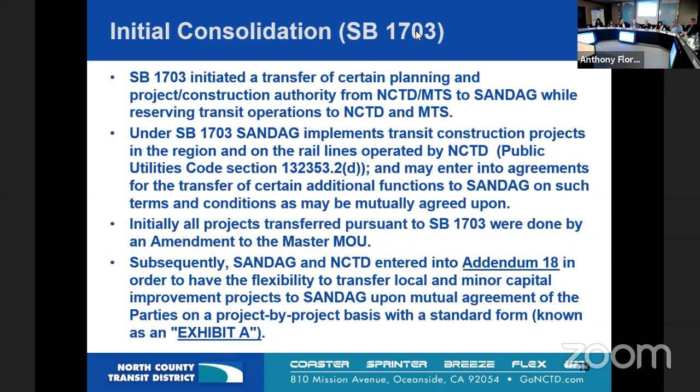Digging a little deeper into some of the key functions and policies of each agency type as designated by that master MOU, SANDAG, as the Metropolitan Planning Organization, develops the Regional Transportation Plan, which spans several decades, the Short Range Transit Plan, which spans 5 years, and manages policies such as the public input process and the regional fare policy. SANDAG also provides technical assistance to the operators, as well as defines regional and corridor transit services and parameters for local transit services.

Additionally, the operators MTS and NCTD must develop service implementation plans, which the SANDAG Board of Directors ultimately adopts. Within those service implementation plans, NCTD and MTS are responsible for planning and implementing regional and local transit services, including the development of schedules, operating, and capital budgets. The operators also provide input to SANDAG on their long and short range transit plans.

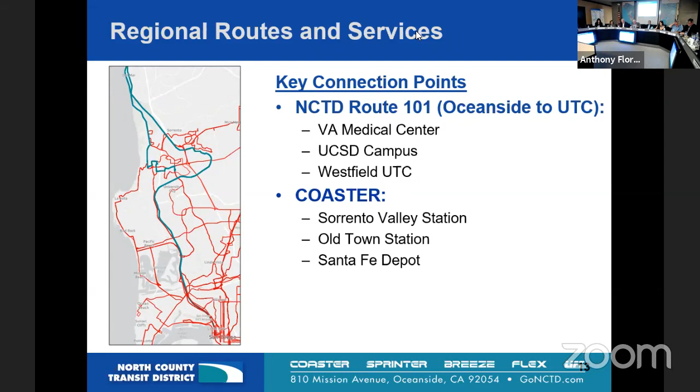When looking at the transit services as a whole in the region, there are a few key connection points between NCTD and MTS services. On the coast, we have NCTD Route 101 and the Coaster, which travels into MTS's service territory. You can see Route 101 and Coaster in teal and MTS's bus routes in red.

Further inland, we have MTS's routes 235 and 280, which travel between Escondido and downtown San Diego. Additionally, NCTD's Flex services connects with MTS's rural services in Ramona.

NCTD is currently in the process of developing its 10-year strategic plan. In the fall of 2019, the consultant team conducted an intercept survey throughout NCTD's service area to better understand the travel and transfer patterns of its existing customers. The top 3 locations where surveyed NCTD customers transferred were Vista, Escondido, and Oceanside Transit Centers.

Additionally, nearly 80% of all surveyed transfers occurred between NCTD services. That would be Breeze to Breeze or Breeze to Sprinter, for example, while 18% occurred between NCTD and other agencies, which includes MTS as well as RTA, Metrolink, and Amtrak. Of that total, 11.4% were coaster interagency transfers.

Now we'll take a look at the shared technologies between MTS and NCTD. We have our regional fare collection system. You might recall at the January board meeting, MTS staff provided an update on the regional fare collection system branding. The next generation fare collection system will replace the existing system with new hardware and software by the end of this calendar year. The existing system has servers located at MTS facilities with smart card systems installed on all regional buses and TVMs at all rail stations.

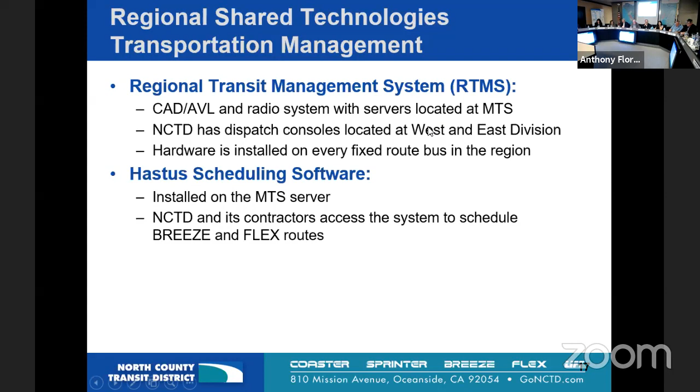A few other shared regional services: we have the Sorrento Valley Coaster Connection, which is a service operated within MTS's service area that also benefits coaster customers. We also have a unified fare structure that was simplified this past year and enables customers to purchase a pass from either operator, and it works across multiple modes. And we also have bus bridge services. Under the existing MOU between MTS and NCTD, MTS provides bus bridge services for coaster service disruptions south of Solana Beach to ensure a timely response to service disruptions on the corridor.

And with that, any future decision to consolidate the transit agencies in the region should be predicated on the NCTD board's determination that such consolidation provides benefits to the region, creates efficiencies, protects the service needs of North County residents, and other public policy considerations of importance to the board.

At this time, none of the board of directors of SANDAG, MTS, or NCTD have publicly discussed or proposed consolidation of the transit agencies. Accordingly, NCTD staff proposes that the board express its support for maintenance of language provided in NCTD's current enabling legislation.

So for now, I will pause for questions on the legislative agenda before we get into the discretionary grant strategy.

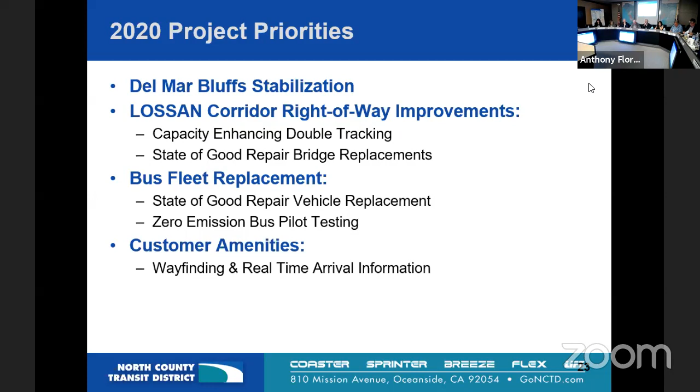So our project priorities for 2020 include the Del Mar Bluff stabilization, as well as LOSSAN corridor right-of-way improvements such as double tracking and bridge replacements, bus fleet replacement including both state of good repair and procurement of zero emission buses for pilot testing, and customer amenities such as static and digital wayfinding and real-time arrival information.

NCTD is continuing to work with Sandag, Caltrans, and other state partners to identify state programs in which the Del Mar Bluff stabilization is a competitive project. There are also several shovel-ready double tracking projects along the LOSSAN corridor, which would compete well within many of the programs that emphasize transformative capital projects.

So a few key upcoming submittals include the Del Mar Bluff stabilization, which we're submitting with Caltrans and Sandag to the USDOT's INFRA program, and then two hydrogen bus procurement projects, which include the procurement of 8 hydrogen 45-foot buses to the FTA's low or no emission bus program and bus facilities program.

And with that, we have the staff recommendation that the Board of Directors adopt and authorize staff to implement the calendar year 2020 legislative agenda and receive the calendar year 2020 discretionary grant strategy.

So I'd like to just restate the substitute motion for the board's clarity. The staff recommendation is to approve the legislative agenda, which includes approval of support for the maintenance of the existing enabling legislation, and the added piece the board has placed as a substitute motion is to direct staff to prepare a written letter for the board's collective signatures, to be sent to Sandag in support of the maintenance of the existing legislation.

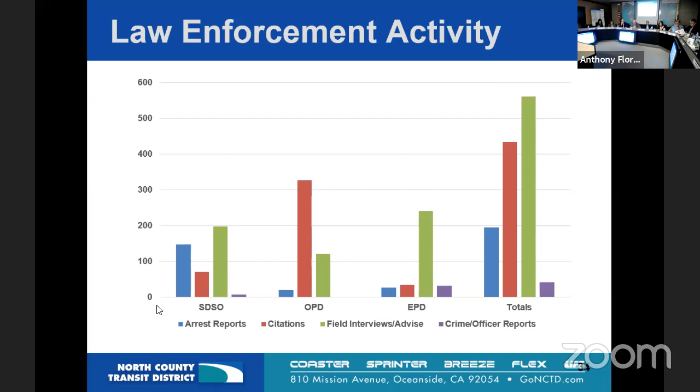I have a little expansion on what we're doing to address some of these fare evasion challenges on a couple slides coming up.

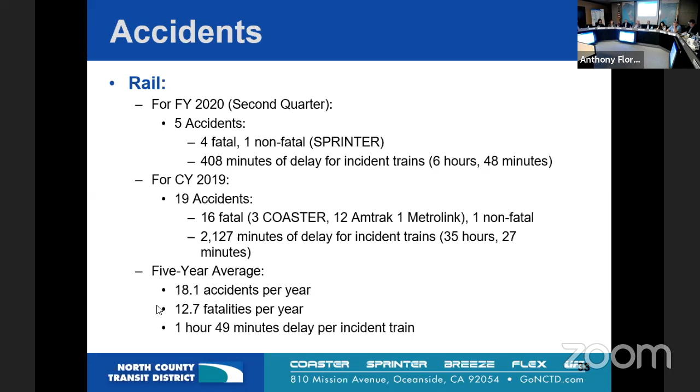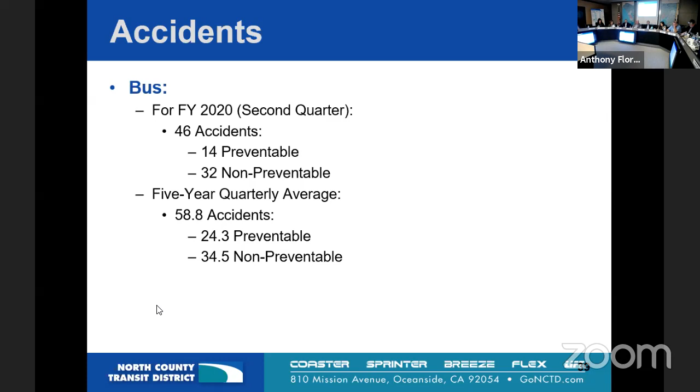Trespasser mitigation study is ongoing. As a reminder, we started back in October with 3 specific locations we were looking at in Oceanside, Encinitas, and Del Mar. We received a draft site conditions report and did a workshop a couple weeks ago to review potential risk reduction alternatives. It was a productive meeting. We have a final report due to us on the 1st. I know I've worked with some of your city managers that want to review the report, so that'll be available for comment. It's scheduled to come to the board in April, combined with another item involving key fencing at some of these locations, along with the trespasser mitigation study results.

Towing and signage: we've executed 4 towing contracts with 4 different companies, covering all of our parking lots, platforms, and stations throughout the service area. There are sample signs in production right now. Once they're produced, we'll install them and then coordinate with the appropriate tow truck companies for those not following the rules. In addition, we had additional suicide prevention signs created, and those are being installed as we speak on the Escondido subdivision. All of our stations will have signage with that crisis hotline number for folks to call should they desire.

How long can somebody, if they get on at Oceanside Transit Center and go down to, say, the airport and fly away for a week, leaving their car at the transit center, what's our time limit on parking at the different stations?

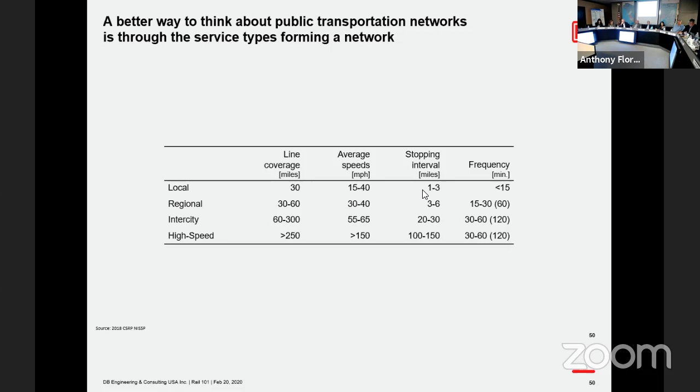Systems, again, going back to competitive journey times, convenience, and consistent quality. I want to give you a quick example of the region of Zurich again. I have a few Swiss examples built in here, European examples, where in their strategic plan they detail further out what elements or components are the basis of those 3 main success factors.

On competitive trip times, of course, providing direct connections where you can—and that's the big caveat here—where you cannot always and everywhere provide frequent direct connections, and therefore it's equally important to optimize transfers between services.

In terms of easy and convenient use, one important factor is providing repetitive so-called pulse schedules. I'll get into this in more detail because this is a key element that connects a lot of those things, and it's a key element behind the LOSSAN optimization study as well. Pulse schedules mean services operate repetitively every 30 minutes or every hour, with a consistent pattern throughout the day. I'll get into more detail on that.

And then consistent high quality, which is defined as providing long hours of service, dense or frequent services, and guaranteeing connections and providing reliable service. So there are a few components here that are equally important. They are influenced by how we plan the service, but then also how it's being delivered.

Going into the pulse scheduling and the details there, it is an important approach that brings together a number of those success factors. We talked about some of the benefits on the passenger side, that it's simpler to use, more intuitive, but equally important, there are real benefits to providing repetitive, more simplified and standardized service on an operation side as well.

First of all, by providing connections more consistently, services are able to create a more extensive market reach. Vehicle utilizations are almost always better because the rotations of the vehicle are better, and there are also benefits to punctuality. And lastly, and often from my perspective most importantly, a pulse type schedule with repetitive services is also the best way to use capacity and use the infrastructure in the optimal fashion, and have a tool to do good planning.

This next section is about being able to identify what investments truly make sense. Because investing in rail infrastructure, and specifically when it's about rail, always takes a long time and costs a lot of money, and those projects had better be exactly what you need to unlock better service.

To briefly explain this connections and connectivity by design versus connectivity by coincidence concept, I want to explain this repetitive character. A pulse schedule has different key locations in the network where all the services come together and provide an ability for passengers to transfer.

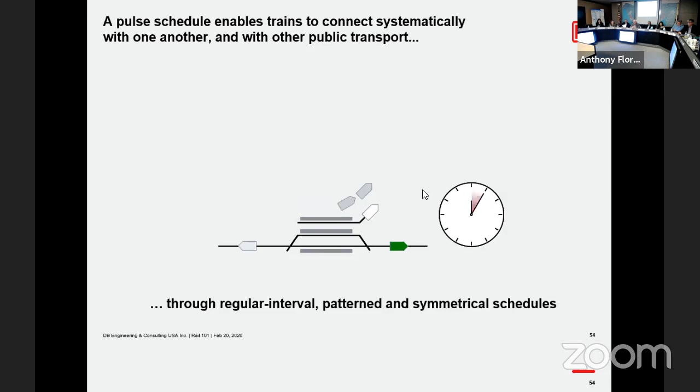And that happens not only once, but repetitively throughout the day, so that even people who want to make a trip that involves a transfer know what to do every time, every hour or every half hour when these services operate. To put this into context, this is also the now-adopted vision of the state with the most recent state rail plan, where a network of repetitive pulsed services throughout California, making key connections at key locations, is the vision for 2040, and subsets of that for the implementation years.

International benchmark examples, like Switzerland, give us a lot of understanding of what the effects are of those sort of systems.

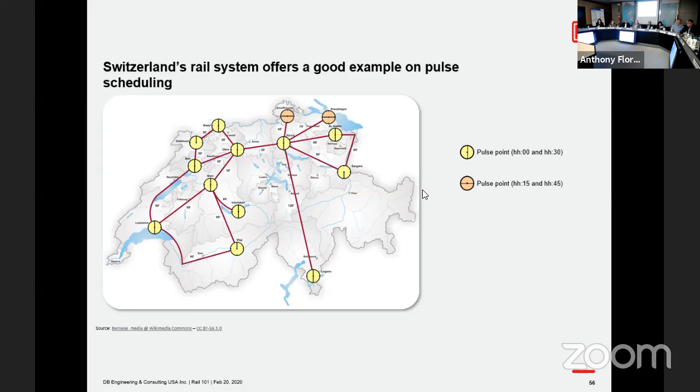To make that a little more tangible, I brought a quick video of these transfers as well. You have to excuse it, it's shot by myself a few years ago with an iPhone a few generations back, so it still shakes a little. And you know, they now have really good algorithms and software to prevent this.

Buses arrive, in this case around minute 45 and minute 15. Buses come in, and then train services come into the station. This is actually a station that has roughly a similar layout to Oceanside, with a corridor that goes north-south, 2 different lines on that corridor that go into different directions, and then a third line that comes in and terminates at that station. So within a few minutes, all the services come in.

The station is occupied by 5 trains in total. Everybody, or a lot of people, get off and transfer to either the other trains that go into other directions or onto buses.

And then within a few minutes, everything departs again and the station empties out, where first all of the different train services, one more express, one more local going into the direction of Zurich, leave. And then lastly, a few minutes later, the buses leave the station.

The buses here, maybe take a look on the inside. They're not completely packed because this is 10:30 or 10:45 in the morning, but they still have quite a few passengers riding because it caters to a whole sort of different needs, not just commuting to work, but also leisure trips, business trips, shopping, visiting a doctor, and so forth.

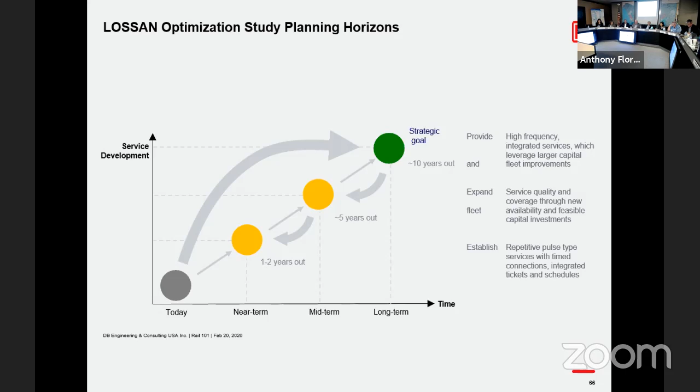Right now we're working on this service design. We're developing different network maps with the connectivity options. There are always trade-offs; often you cannot get everything because things are interdependent. So we're working through a whole number of scenarios, looking at the operational impacts and the associated infrastructure projects. There are frequent meetings that include NCTD as a stakeholder as well.

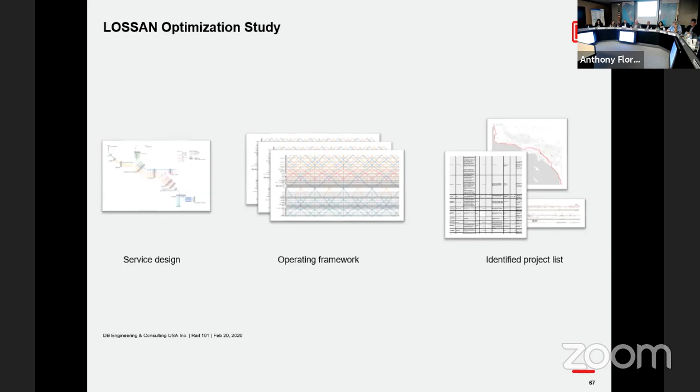On the coaster side, I'd like to zoom in to that part of the corridor and give you an update. One of the candidate concepts right now for the near term, still working drafts but supported by more and more arguments, is a 20-minute service, or the ability to run 20-minute service. You have to distinguish between what the infrastructure is able to carry and the later decision of what exactly you carry all day long. So about every 20 minutes, service made up of Surfliner trains and Coaster trains.

Then I'll skip ahead to the long-term concept. In the long term, again about 10 years out, assuming that a lot of the double tracking work in the San Diego area—projects that have already been started or are constantly being pursued—are in place, we developed a concept that in this area of the corridor would provide the ability to run up to every 15-minute service, where one of those trains is a Surfliner and 3 trains would be Coaster trains in each direction. Those concepts are still constrained by some of the single tracking that remains, and that constrains the corridor not only in this place, but also exports some of those constraints further north through the Surfliner trains.

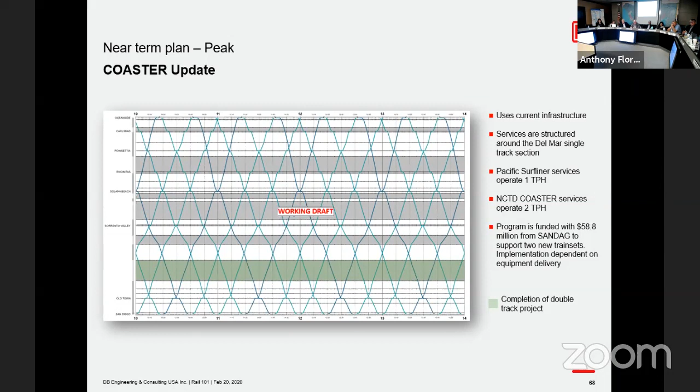Thank you very much. Yes, and indeed the surfliners here in this part of the corridor are an express service. They are a few minutes faster. It's not a huge difference because there are still constraints of the infrastructure, and one of the big constraints is single tracking around Del Mar that also imposes this 20 minute kind of distribution in both directions around this area.

But then towards Oceanside, the surfliners make up a bit of time, and towards San Diego as well. The long term goal, through diminishing or eliminating some of those constraints, provides the ability to run 4 trains an hour that are running roughly every 15 minutes, still one of those trains being a surfliner and 3 being coaster services.

So the coasters here would run 15, 15, 30, 15, 15, 30, and in off-peak times, you could easily downsize this to coasters running every 30 minutes or just once an hour, and then together with the surfliner, still providing between San Diego and Solana Beach trains that operate evenly distributed every half an hour, where every half an hour you have an option to take a train.

With that, I would like to give you a brief update on the Sprinter work as well. As I said, by amendment, the Sprinter corridor was added to this work too. And the goal here was to look at

mainly 3 different concepts for improved service: to look at potential benefits of express service that operates using the freight bypass, looking at increasing frequencies to either 20 or 15 minutes, and to look for opportunities to better connect Sprinter services in Oceanside to services on the LOSSAN corridor.

We looked at 3 different concepts: one with this express service using the freight bypass, then a concept where we looked at what the Sprinter corridor would look like if trains operated every 20 minutes, and what it would look like if we operated every 15 minutes. The conclusion is that the 15-minute service provides the best connectivity in Oceanside and also works well with existing double track segments on the corridor already that are necessary now to operate the every 30-minute service.

With that, I'll confront you with another one of those colorful slides here. So this is the every 15-minute service. 2 different colors here, green and brown, that indicate new double track that would be required to make this service frequency possible from the infrastructure side.

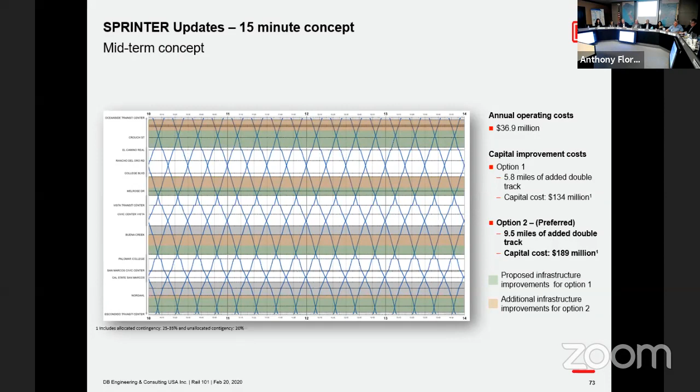In addition to that, we were asked to put together a couple hypothetical scenarios to test the effect that higher speeds on the corridor or different rolling stock would have. For that, we looked at a hypothetical 22-mile long corridor with either 15 stations, 10 stations, or 5 stations, and looked at two different speeds: operating like it does today, up to a maximum of 55 miles per hour, or up to 90 miles per hour.

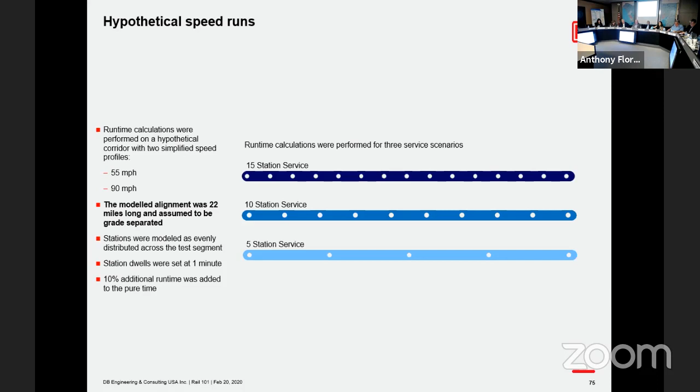Here we were looking at the current rolling stock, which are Siemens DESIRO. We also looked at state-of-the-art DMUs like the Stadler Flirt, and at potentially electrified multiple units.

The main difference between those rolling stock types are two things. One is their maximum speed, what they're allowed to go up to, and equally as important, the mean acceleration that really drives the difference between run times, if those vehicles are able to accelerate faster and get to those maximum speeds faster. Generally, diesel trains are slower at accelerating and electric trains are faster, and more modern trains typically are better because there's a continuous push to improve acceleration.

The overview of those different scenarios is this table. On the left-hand side, the scenarios that used a 55 miles per hour maximum speed, whether you have 15, 10, or 5 stations, and what sort of rolling stock is used, whether it's the current train sets, a modern diesel train set, or a modern electric train set. On the right-hand side, you see the same information for 90 miles per hour. The main insight is that changing speeds on their own has little impact.

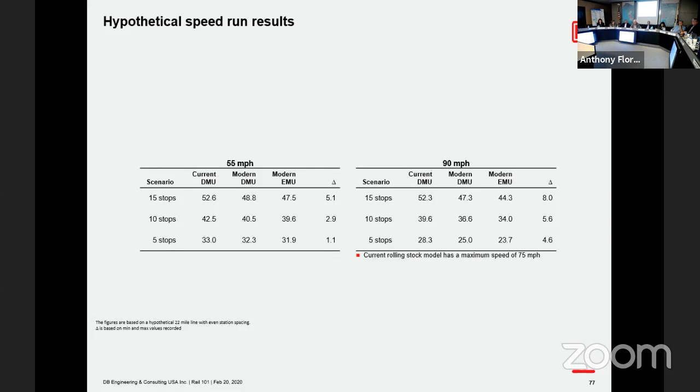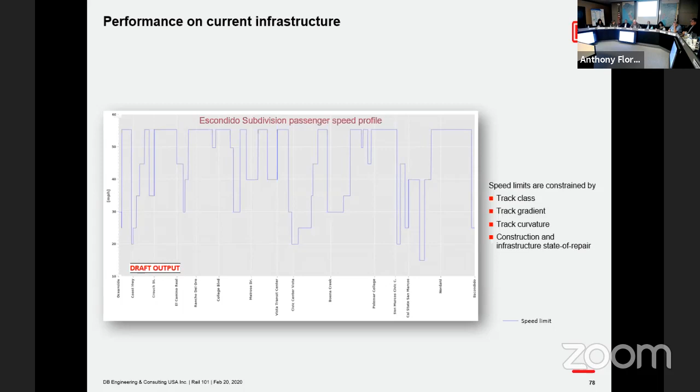One last diagram, just a different type to make this more tangible. Again, this is speed over distance. On the horizontal axis is the Sprinter corridor, Oceanside on the left, Escondido on the right, and speed on the vertical axis. The blue line is the maximum speed allowed in different segments of the corridor today. The absolute maximum is 55 miles per hour in some places, but there are various places where the speed limits are considerably lower, sometimes just 20 miles per hour, and sometimes even less, just 15 miles per hour.

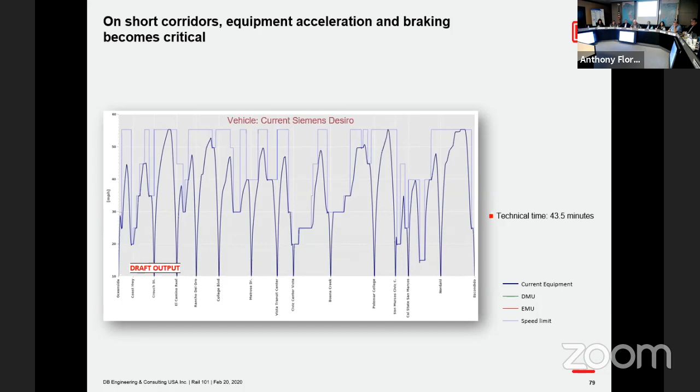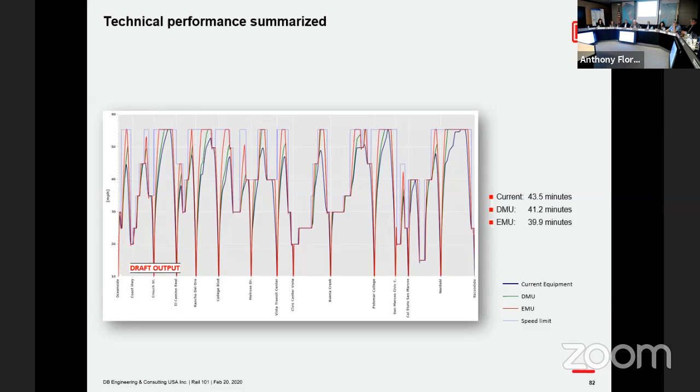A modern diesel multiple unit would accelerate a little faster and save a bit of time. An electric would be even faster, but again, it comes down to how much time you can really save. I'm not advocating for any new solutions here, we just did the analysis and compared the effects. With different vehicle technology, for example on the Sprinter corridor, savings would be somewhere around 3 minutes, and whether or not that's worth it is either part of a separate analysis or just a political judgment.

Final conclusions: there are significant costs in changing technologies from diesel to electric that must be kept in mind. NCTD is evaluating a future implementation of zero emission train technology with a replacement of the Sprinter fleet, which will need to occur by 2033 just due to train sets reaching the end of their life cycle.

Given the lengths of the existing corridors, there is currently no significant project activity that could yield substantial travel time savings, like increasing speeds and so forth that we just looked at. Thus, the recommendation is to keep the focus on increasing frequency, increasing reliability, and overall customer riding experience, including making connections to other services better, and supporting an increase in frequency of Sprinter and Coaster.

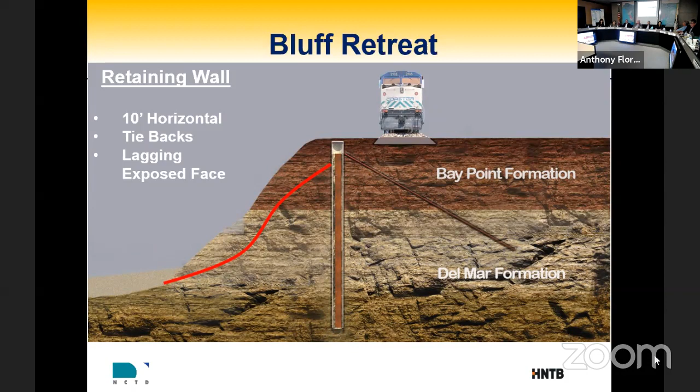Over time, we add in a lagging wall between them so it supports the material behind. It actually acts as a wall that we want to explain a little bit more about. We're going to get some help here from Imelda.

When we look down right now, we don't see anything. But in just a minute... okay, can you pause that for a second? We see... one more. So we see those soldier piles. Those soldier piles — we don't see them when we're walking out there, but they are under the ground, 10 feet apart.

Imelda, let's go on with the rest of the visualization — we'll show you exactly what happens here. First, we start with our soldier pile. It's a concrete pile that goes into the ground. You see the tieback that's in there, and there's a steel H pile in the middle of that concrete. The area in the front can fall away, and we expect that it will fall away.

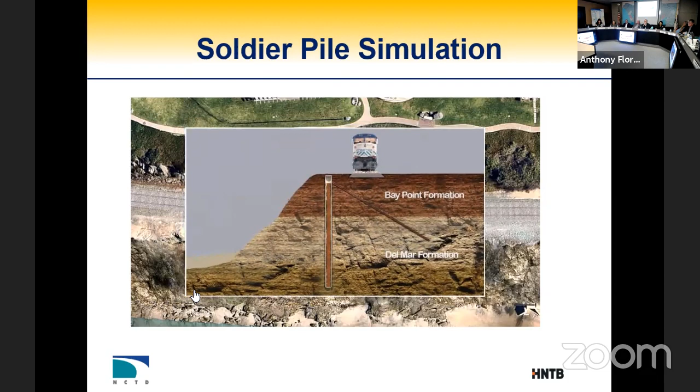Let's go back and take a look. There are soldier piles — we really don't see those soldier piles. They're going to go away in a minute here. What you see over time is that material starting to move away from the soldier piles, just from the natural forces of wind, rain, etc.

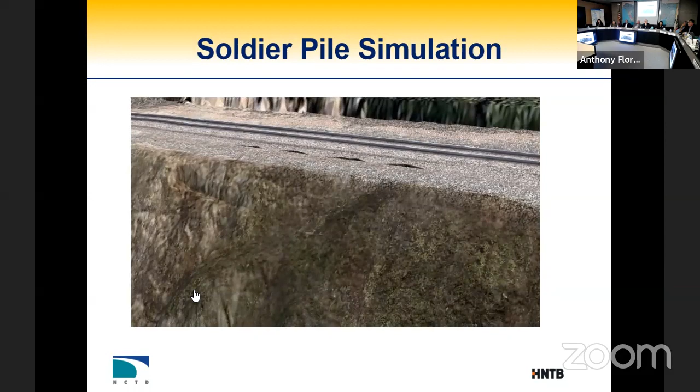Stop that now for a second. So what you see behind there — see how the arching occurs behind? That is actually strong enough to support that train load. That's exactly what we saw happen just after Thanksgiving, with the material actually standing and supporting the train.

Now, we can't leave it that way because it's going to be exposed to rain, wind, etc. So go ahead and start again — we're going to remove all of that material and clean it up.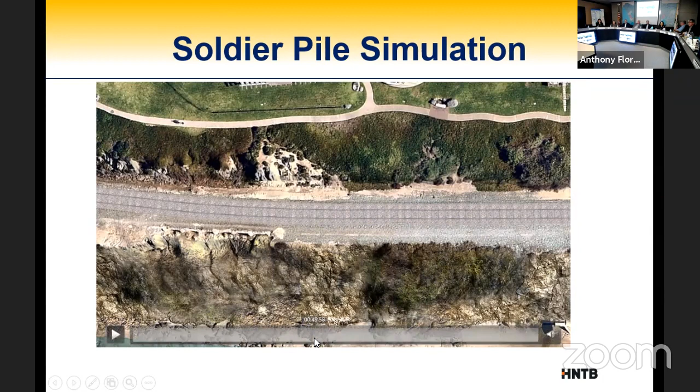Once we have everything cleaned up, we're going to add in dowels and a steel cage behind. We're going to put dowels into the existing piles, build a regular concrete wall like you would expect, then stand back and add some rock sculpting to it. We're going to put the ballast back in on top, fill back in as much as we can, and make it look like the bluff.

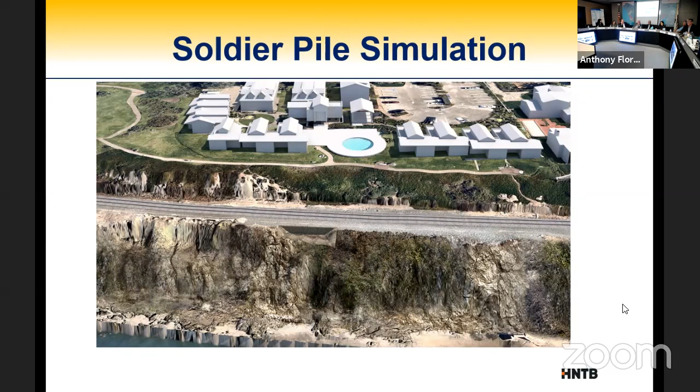That brings me to our next topic for this project. The train was moved to the bluffs in 1912, and we still have some 1912 infrastructure out there controlling our runoff. We've had a lot of development since then, so increases in runoff, concentration of runoff, and subdrainage are all issues for protecting the bluff. Controlling that water and not allowing concentrated water onto the bluffs to cause localized erosion is critical to avoiding significant failures.

This project includes a new complete analysis of drainage improvements. Some improvements were made back in 2000, but we haven't done anything since to repair drainage systems and control the concentrated runoff coming onto the bluffs. That will be part of what we do. We'll build the most significant improvements in Del Mar Bluffs 5, and plan for the future.

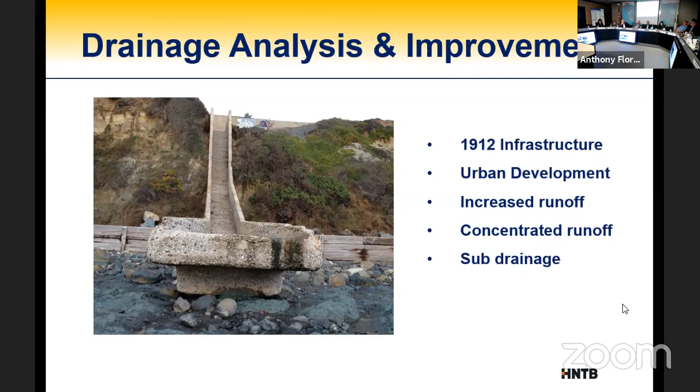Service life - the service life of Del Mar Bluffs 2 and 3. When we talk about service life, we talk about 20 years of bluff retreat. That was the time frame we used to estimate how much retreat we'd have when designing that soldier pile retaining wall. That really came from an estimate of needing 20 years before we had a tunnel. Well, we're in 2020. In 2000, we thought we'd have a tunnel by now, and we don't.

So times have changed. Those soldier piles, though, aren't gone - they've been there for nearly 20 years. They're still going to act as a shear pin the way they were always designed. It's the retaining wall function of them that was designed for 20 years of bluff retreat.

Now we're going to go in and do a reevaluation of all the priority areas, because obviously over the last 10 and 20 years, things have changed. We know we're going to complete the areas that were previously low priority, but there will be new areas too. In areas like you see here where material has sloughed away and it's close to the design height, in the coming years those piles will need additional reinforcement once they exceed that acceptable design height.

The bluff retreat trends - that's one thing we do have going for us now. From 2000, 2008, 2018 to 2020, together with work from Scripps, we have a better history of what's happened on the bluffs. We estimate 6 inches per year, but it's actually a very episodic thing - you see blocks fall, you don't see 6 inches at a time in general. So we'll be able to look back and see if there are any more trends in certain areas that would supplement that 6 inches per year estimate.

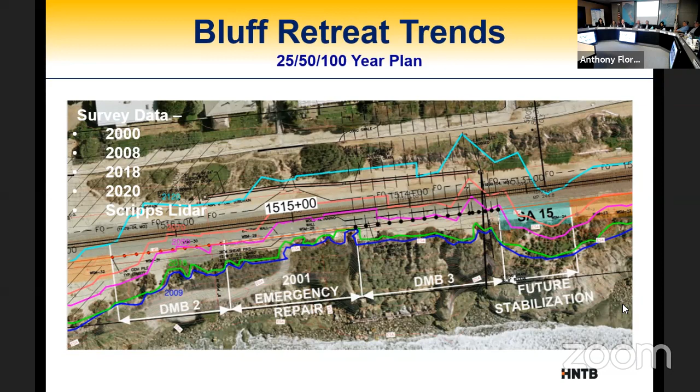That was 20 — the blue is 18. Excuse me, the blue is 2010, then we're at 2018. I don't have 2020 on there yet, and I don't have 2000 on there yet. Very simplistically, right now we offset 20 years into the future, 50 years into the future. Where would you be in 100 years? We're not going to design for 100 years, but we don't want to just be in a vacuum — we want to understand how these soldier piles might fit into the future.

Which brings me to how we can extend the service life of the systems we've already built. Looking at the soldier piles we built in Del Mar Bluffs 2, they're shorter, not designed for more than 20 years, and they're getting close to some of those areas. You'll see the red line — in the future we're going to see more bluff retreat. So the solution to extending the service life of those piles is to add more lagging and another tieback. It won't last forever, but it will increase the life of that facility in place.

When we look at other solutions like what we're doing now, we're looking at simpler things — can we make some of our piles longer rather than putting a tieback everywhere? Longer piles now are about the same price as a pile and a tieback, but it gives us more flexibility for the future. We also want to apply lessons learned from previous projects where we added lagging, because lagging looks bad to the news media. We really intend for it to be there, but we're looking for simpler, more expeditious solutions for adding that lagging instead of designing case-by-case — just lessons learned on how to make a more efficient system out of soldier piles to support our bluffs.

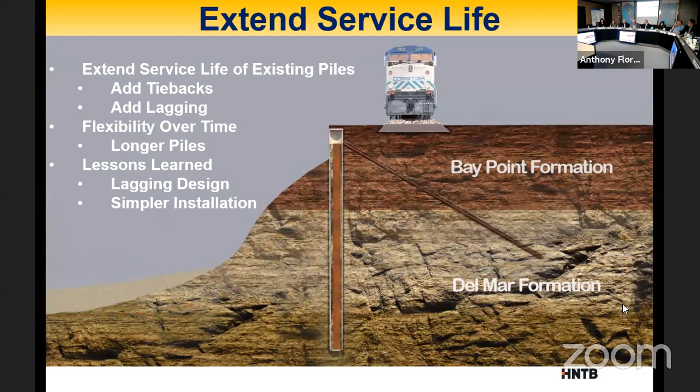So what time frame are we talking about for that in the future? And is this part of Del Mar Bluffs 5 or 6, or is it included in the budgeted costs we're currently looking at in the work plan?

There may be some in Del Mar Bluffs 5, but it's probably going to be in later stages based on what we've seen so far, though we don't have all the data yet. We're just starting the Del Mar Bluffs 5 process, and what we've seen so far is less retreat than expected. So I don't think we'll see a need in the next 5 years, but in the next 10 years we may, and we'll have to look at it more closely.

Del Mar Bluffs 3 is a little different. Most of the stabilization there was seismic, so those soldier piles wouldn't need the additional reinforcement we're talking about. It would be the ones closer to the bluff. Okay, thank you.

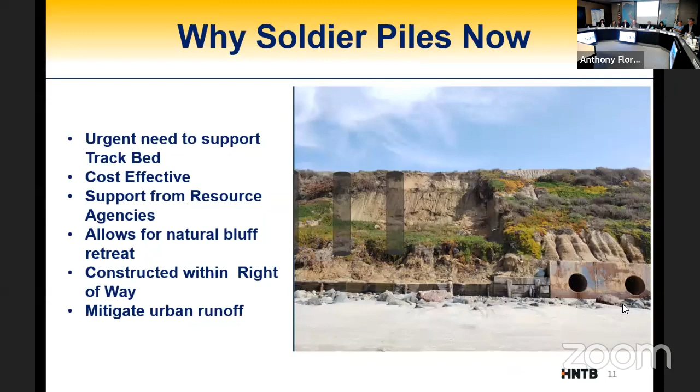Good afternoon, my name is Tim Belsman with Helix Environmental Planning, and I'll provide a brief overview of the environmental review process for Del Mar Bluffs 5 and 6. For Del Mar Bluffs 5, we'd expect and anticipate what's happened on previous phases, which has included a NEPA categorical exclusion from FTA or FRA.

No CEQA has been required because those projects have utilized the Interstate Commerce Commission Termination Act and related Surface Transportation Board rulings that preempt them from CEQA and other state and local environmental laws. They've been applied to improvements within intercity rail, interstate rail lines, which benefit either passenger or rail services and are generally within the railroad right of way, although that's not always absolute.

Like the past phases, Del Mar Bluffs 5 would require a federal coastal consistency certification from the Coastal Commission, as well as regulatory permits from agencies where impacts would occur to federal jurisdictional areas. It's estimated that getting environmental clearance for Del Mar Bluffs 5 would take about 12 to 18 months.

So Del Mar Bluffs 6 is a much larger project, with greater scope and magnitude of improvements compared to the previous phases.

So we would expect the environmental process and requirements to be more complex. It would be subject to both NEPA and CEQA because we are extending outside the railroad right-of-way, and we would anticipate the environmental documents to be higher level documents than what's been required for the previous phases and what we anticipate for 5.

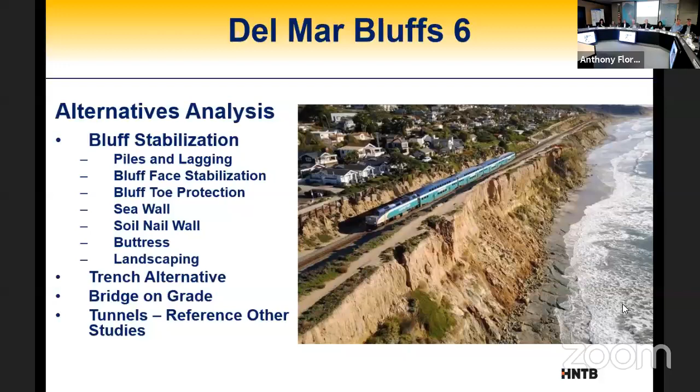No. All right, thank you very much. Thank you.

Okay, let's jump right into it. I was asked to talk about how BNSF might approach a situation like the Del Mar Bluff mitigation project. It's difficult to discuss what BNSF would do in any specific situation without access to all the technical data, since data is a big part of our process. So I thought it would be helpful to take a step back and take a global approach, looking at a couple of other unique projects we've looked at across the system, to find common denominators between different projects and how we approach different unique situations.

Whenever we're looking at a project, there are three things we balance. Safety, both long and short term. Impact - on our service, our customers, stakeholder communities, and the environment. And the last thing, which most of this presentation is going to be concerned with, is practicality. We always look for simple, practical, and cost-effective solutions to our engineering challenges.

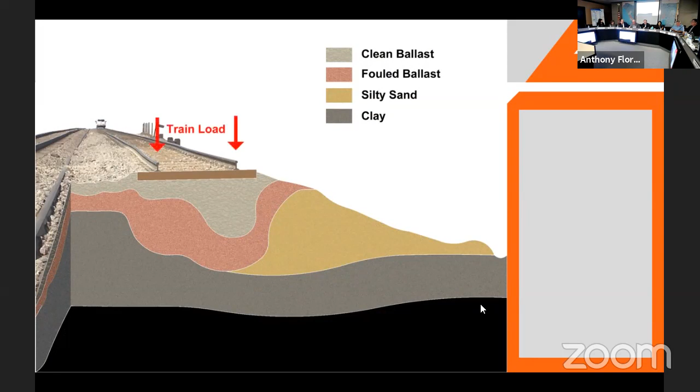Under train load, you often get deformation, and these different layers - the top layer being ballast - will eat into the weaker layers below. One thing I want to point out is that these different layers have different permeabilities, which is the ability of water to move through that material. Keep that in mind when we get to the Del Mar erosion project, because water will pond in that material, seep into the surrounding soil, and cause weakness. In geotechnical terms, water is always the enemy.

Earlier in the previous presentation there was some talk about global stability. Here's what you would see in a global stability failure typical in a track. As you see, it's rotational in nature - in this case the inside rail is dipping, and down at the toe you see a bulge.

So just like what was discussed, one thing you could do is pin it, like what was done at the Del Mar Bluffs. Another thing BNSF does a lot is add weight to the bottom of the toe. If you think of this as a rotational failure with weight coming down, one way to mitigate that is to put weight on the other side to push it back up. A lot of times we find that stabilizes it and helps with erosion as well.

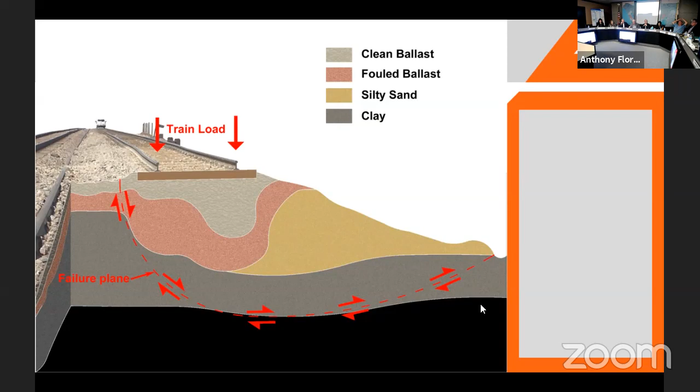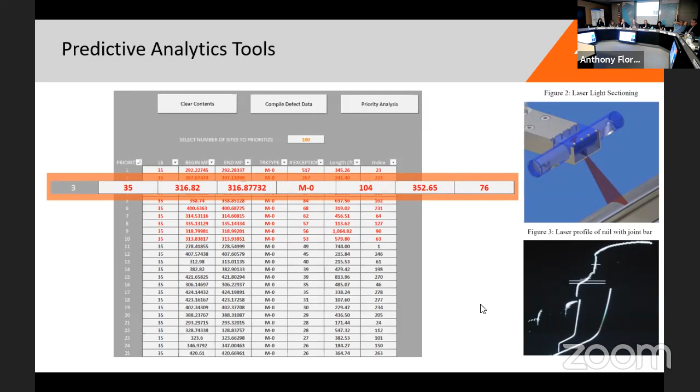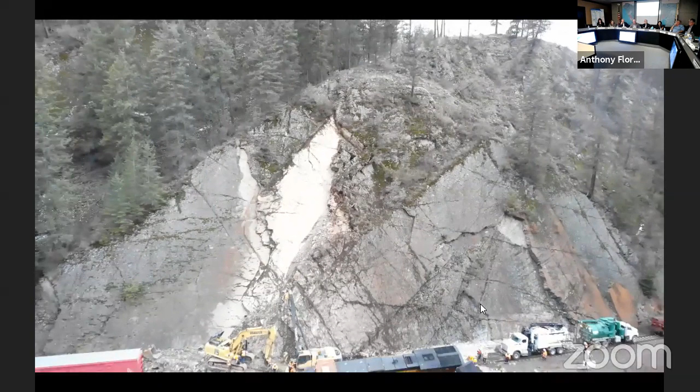As we zoom back, you'll start to see what the physical consequences were to this particular situation, which is pretty horrifying.

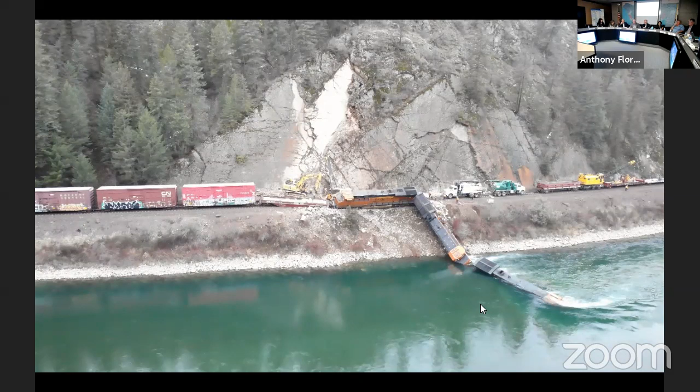So when we talk about the three different balances we use to look at different situations: safety — in this case we want to consider the safety of the rock slide material before we have a lot of men and equipment underneath it. Also impact — we were out of service on a very important line, and just as importantly, there was an impact to the environment.

Nobody was injured or killed in this event. Luckily they were able to get to the top of the locomotive, and they were saved by first responders.

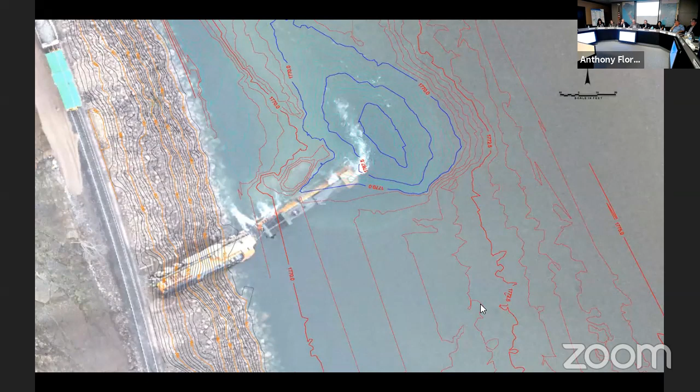Just like with any situation, we want to get as much data as we can. We're not advocating analysis paralysis, because we're moving as we're collecting the data in a lot of cases, but it's important not to just wing it in these situations. You need to get all the data to make critical decisions in the best way possible.

That's some of what we did here, looking at different alternatives to consider the practicality of the situation. We looked at bringing barges in along the river to protect the environment, and we did end up pumping out the diesel oil and stuff. One of the main things was working hand in hand with the DOT and the DEQ on this project — their main concern was that they didn't want the locomotive to roll over on its side. So in terms of cost effectiveness and practicality, sometimes those things take a back seat to the right thing to do from an impact perspective.

In this case, we decided to take a lot of time to prepare the locomotive and to pull it across.

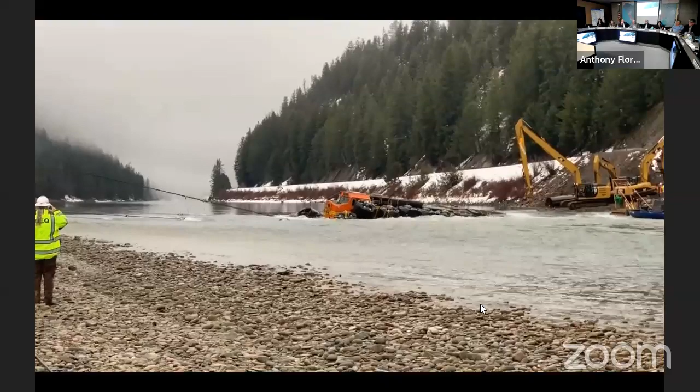Mostly this video isn't really geotech related, but it's got to be some kind of a fishing record, right? I think I'll own the Kootenai River record for quite some time.

Was the locomotive salvaged? Were you able to? No, it was not.

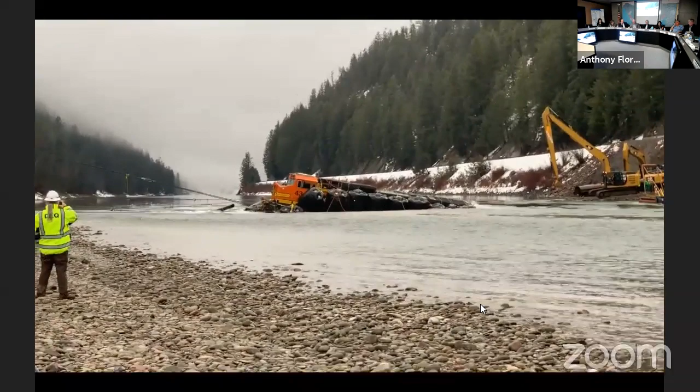From an environmental impact perspective, taking it out that way was the way to go, but we did have to cut the locomotive up into little pieces and take it up old logging roads, because we were on a gravel bar in the middle of a very desolate place. The extraction went smoothly, and having that data allowed us to pull it at an angle that minimized the impact to the riverbed as well. So when we left there, it was exactly as it was before the unfortunate incident.

Here's some additional data that we took, and part of our approach was to use that data not to overdo it. I think sometimes when something like this happens on a system, you want to bring the hammer at it and just lay that slope back with explosives, but that wasn't the responsible thing to do. So we came up with a strategy that was more laid back.

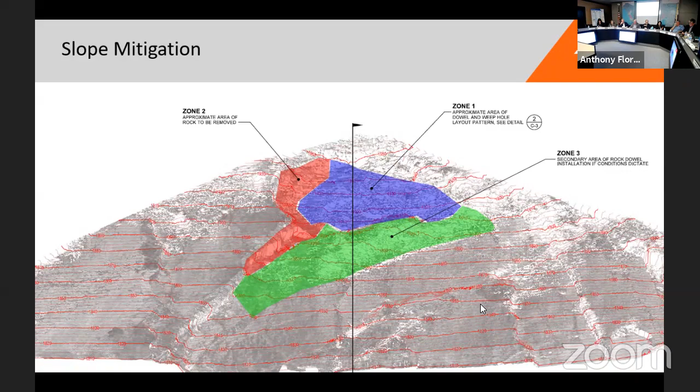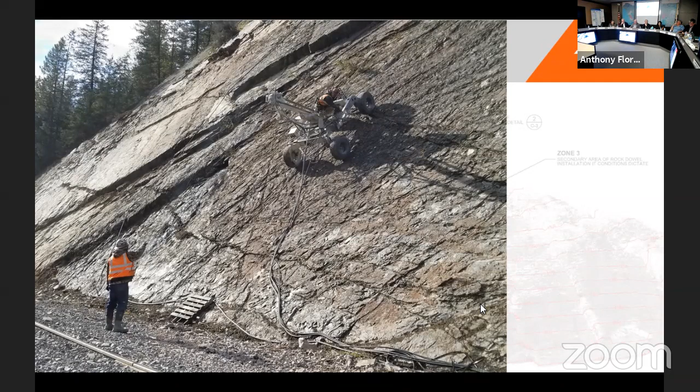We did have to do some blasting, but we also did some bolting. We had this specialized rig built so we could get up there, drill into the rock face, bolt some of those rocks back onto the slope that hadn't completely detached, and then scaled what we could for the rest.

Switching gears to something closer in comparison to the scour and erosion issues we're having at Del Mar. I don't know how many of you heard much about the major flooding that impacted the central heartland of the country in 2019, but it hit BNSF particularly hard, along with many regions of several Midwestern states. We had a bomb cyclone that dropped a lot of precipitation onto already frozen ground.

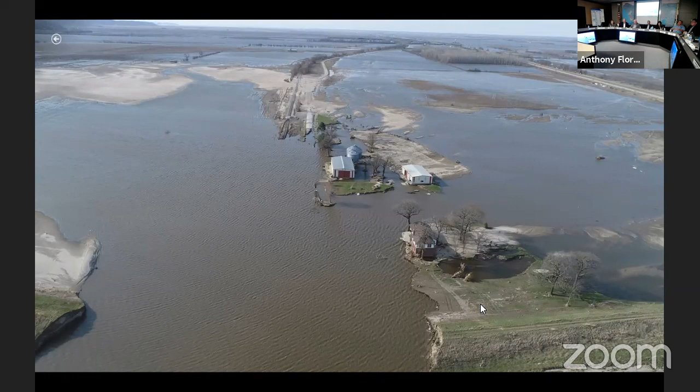This is one of the areas where there should actually be a track, but instead it's a 60-foot deep lake, and that's only about half of it. It's about 3,000 feet there. The water got pinned on the east side trying to get back to the river, and it blew our bridge out.

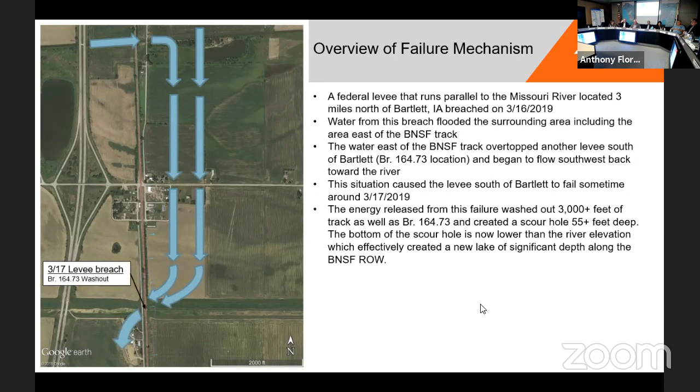Going back to the importance of data and studying the best way to approach something - even in something like this, you might have a lot of sophisticated data, but a lot of times the solution is very simple. You're not trying to win any awards putting the railroad back in service.

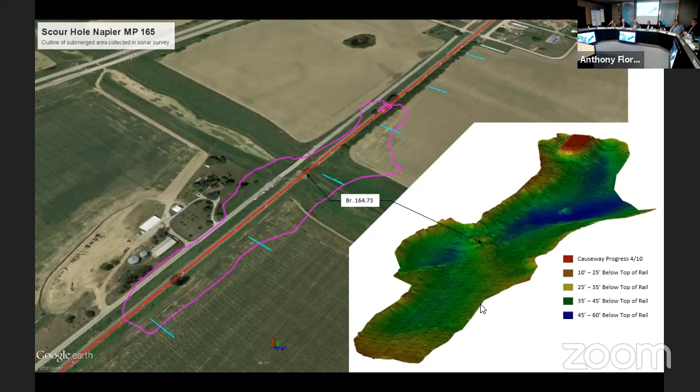This is a good view showing some of the data we were taking in. You can see this was our bridge, now buried under 43 feet of water.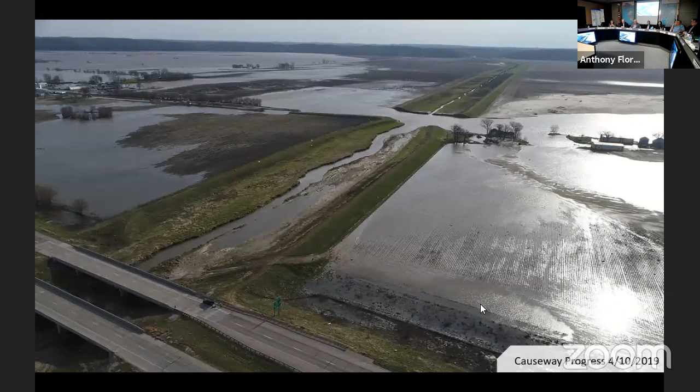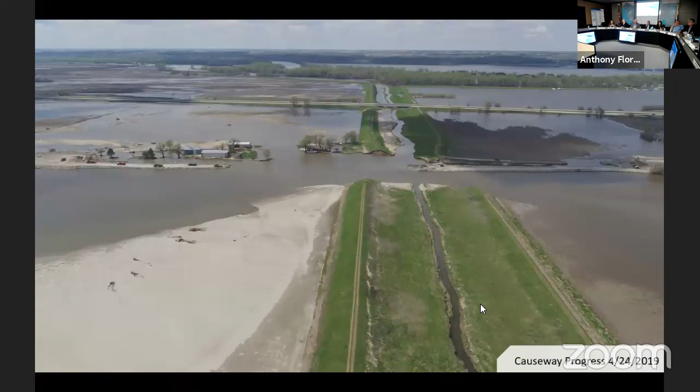Our reconstruction plan - I won't go into detail, but I wanted to show you this just to illustrate managing the river and the erosion impacts that come with that. BNSF deals with river erosion and having our infrastructure attacked by rivers a lot more than we do with oceans, because we run far more river systems than coastline. But they're fairly similar, and what we found is simple solutions work best.

We just used rock - we moved about 500,000 tons of rock and rebuilt the causeway here. You can see this is the end result. We did look at a number of options, including building a mile-long bridge along this stretch, but that was deemed impractical from a cost standpoint, as well as impractical from a constructability standpoint under the active flooding conditions.

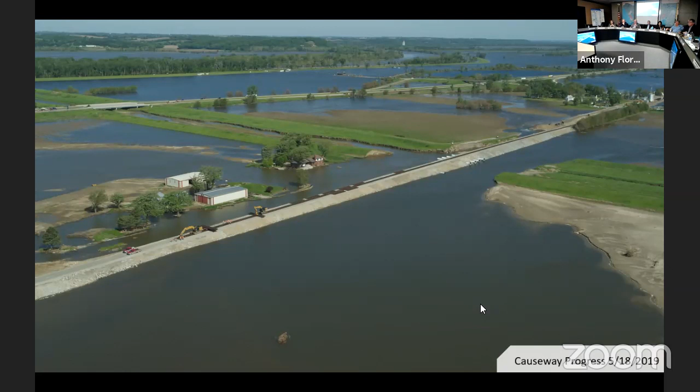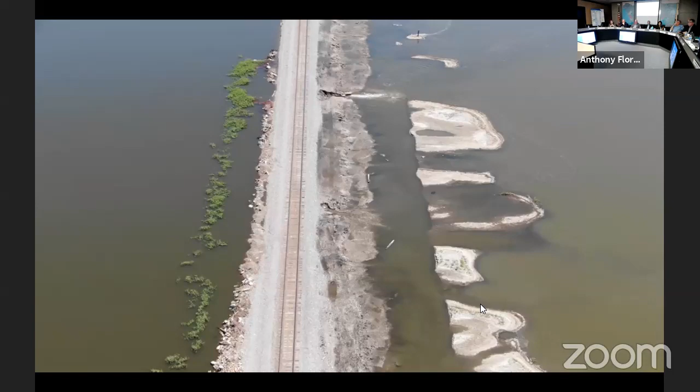This area did end up getting overtopped again, because the flooding hit the heartland again and again this year, but it held up really well. Here are some other images from the flood showing how erosion and scour can impact our railroad, and how it's a constant fight. Again, a lot of times the best way to respond is the simplest way - to hold the material in place with big rocks.

Here's another example from the same flood - this is the Platte River, another tributary to the Missouri River. You can see this is a particularly vulnerable location. The railroads were built 100 years ago when the rivers were in one location, and they want to oxbow out and move to a different location. In this case, that location is right into our railroad right of way, so armoring against that is important.

Of course, floods and other high-activity scour and water events just exacerbate that. So what we've done in the past is very simple - we take the material that was more highly erodible, that scoured away, and replace it with material that's less erodible. It's very cost effective, time effective, and effective in general.

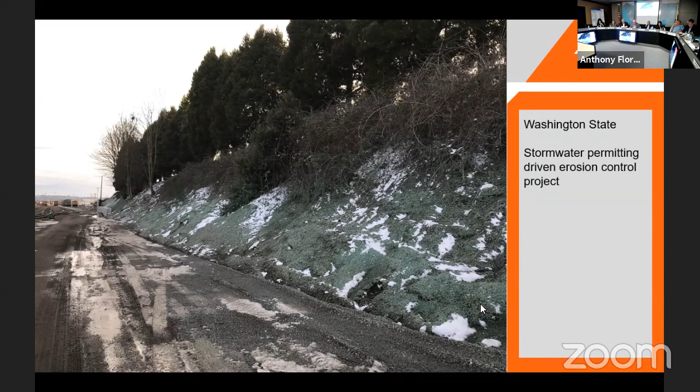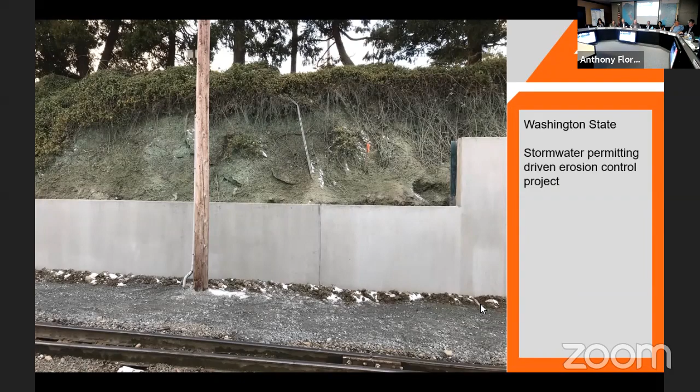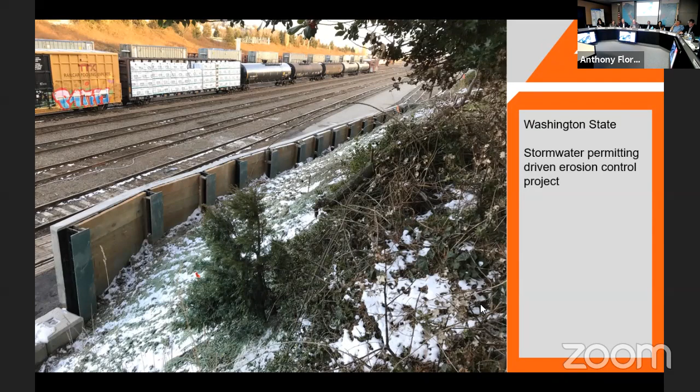Here's another example of how we've dealt with erosion, from the Erosion Control Initiative. This is in Washington State, and this particular project was driven by stormwater permitting in one of our facilities. But we did something slightly different here. We built a wall to retain, and as it fills, it allows that ground to settle back at an elevation that's more natural for vegetation. We went back and seeded that, so now the vegetation helps with erosion of the erodible material, and we found that in certain situations that can be effective.

So, what we came here to talk about is the Delmar Bluff erosion. I haven't been deeply involved in all the previous meetings, and I didn't have access to a lot of the technical data, but I did make it out to the site and take a look. I think the first time I was out there was just after the Thanksgiving event, so late November, early December.

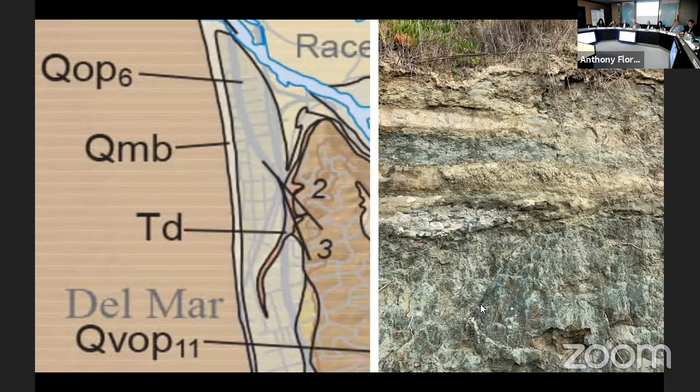I looked at some of the characteristics of the site, and a couple things strike me. The geology of the site is interfingered with multiple different layers of marine conglomerate and coastal sedimentation, built up in layers on top of each other. That's important because, like I mentioned earlier, you get water trapped in layers of different permeability, just like with those ballast pockets in certain places like Del Mar, where water gets trapped inside the slope or under the track. That's a bad thing, whether caused by train loads or by natural conditions like this. So allowing that water to get out is always a positive thing.

These are some pictures I took while out in the field. On the right, it appears to me that NCTD is already well aware of some of these issues. What we see on the right-hand side is a wick drain. My assumption is that we've identified areas where water might be ponding behind there, and strategically placed some of these pipes to drain it, and they were draining when I was out there, even though it hadn't been raining. So we know there's water back there, and that at least at some point there's been strategies in place to try to mitigate that ponding behind the slope.

On the left-hand side, this is what I saw. I was pretty close - I said they were 11 feet on center, it looked like. 30-inch diameter concrete shafts. I was told that they don't go all the way into the sandstone layer. So you've got the interfingered layer of different deposits that I talked about, and that looks like it's about 40 to 50 feet up on the bluff. Then it looks like it's sitting on top of an older sandstone layer, and you can see the sandstone at the bottom of this slide. That's a good thing - it gives you a couple of options depending on what you want to do, and it also provides a little bit of toe protection to the toe of your slope.

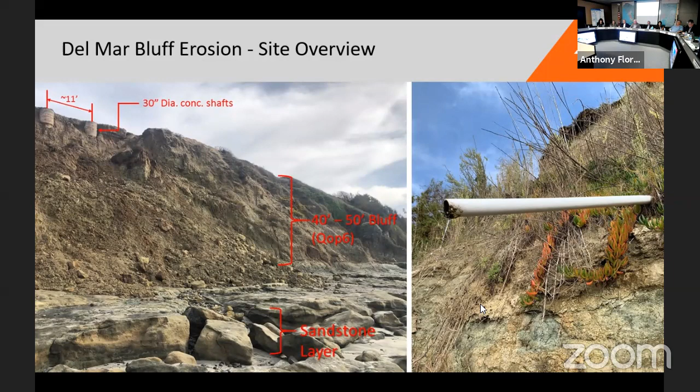But water - the ocean is acting on the base of the slope. So here's the way I see it when I'm out there. It looks to me like there's a couple different things happening, two major things causing the failures out here. The most significant one is bluff erosion due to surface water runoff.

Before I went out there, I had assumed it was going to be a problem with the toe or some type of global stability collapse causing most of these problems, but it's actually not. Water is running along the right of way. My guess is that it's ponding at or near the low points along the right of way, and then it's literally water falling over the edge, taking sediment with it as it does so. If you have a big rain event, you can lose a lot of sediment pretty quickly. The top of the bluff looks like it was made up of more fine-grained particles, silty, sandy materials. The bottom looked like it was a little more cemented, with maybe even some seams of sandstone and other harder material in there.

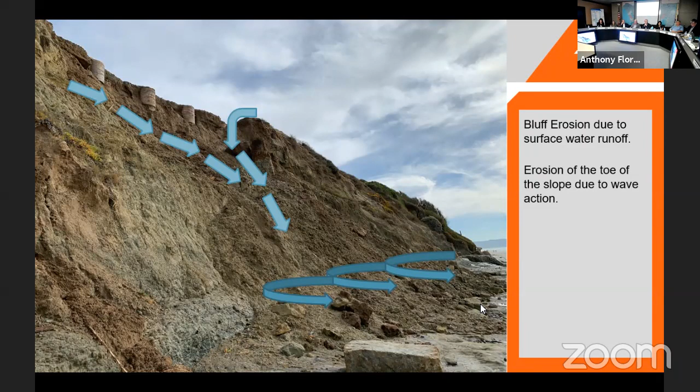So that's one, and for the recent problems, I'd say that's the main culprit: surface water runoff. The second is erosion of the toe due to wave action. It didn't look like that was driving the most recent event, but as the top erodes off, it gets carried off by wave action, and so it never rebuilds itself at the toe. It's constantly moving backwards, and never has a chance to set up at a more stable slope that could carry vegetation or something like that.

Looking around, walking up and down the bluff, it looks like about 1.5 miles worth, if you took it straight in a line, of bluff that looks like it's having issues of some kind or another.

And then looking around, it looks to me like somebody at some point was aware of the issues and were taking action to mitigate. So like I said, you've got the two main culprits: surface water runoff at the top, wave action at the bottom, possibly compounded by some water that's ponding underneath the track.

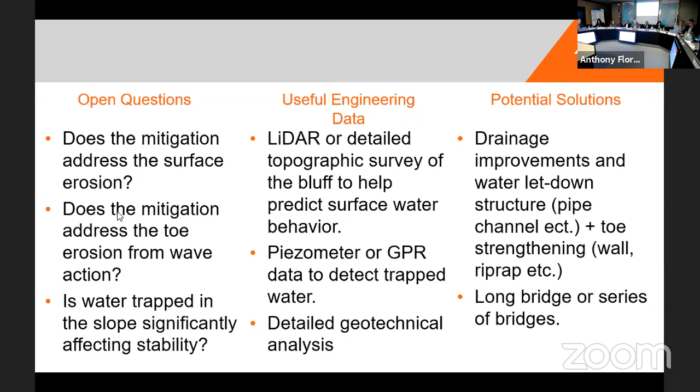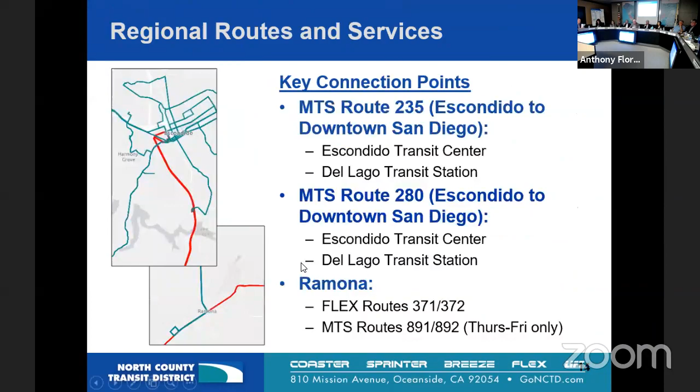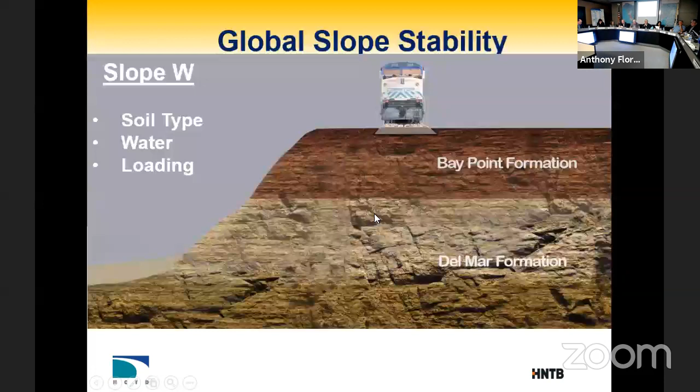The 25th anniversary event is next week. It would be really great if all of our board members could participate. We are really trying to make this a critical year to lead us to stronger ridership and revenue, not just for the Coaster but the entire system.